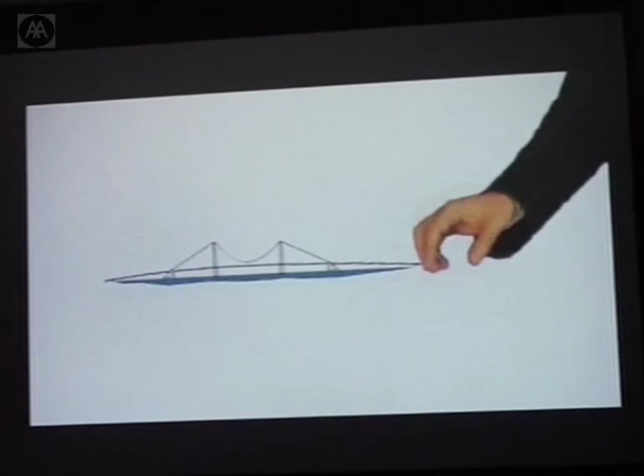Here, Denmark and Germany are planning a new bridge. The most expensive solution is a pure bridge, or a pure tunnel, but a hybrid connection of bridge and tunnel will save €500 million and provide a new artificial island in the middle of the crossing of flows of international traffic.

Today this area experiences negative growth, separating the Coma region, Copenhagen-Malmö, from the growth zones in northern Germany. The new superharbour could become an industrial and logistic hotspot, connecting the two existing growth zones to the continuous growth belt of the blue banana, turning the blue banana into the green slingshot.

The superharbour will gradually absorb all harbour-related industries, freeing up the waterfronts of all of Denmark's major cities for new urban life forms. So what kind of free space are we talking about?

Denmark's 12 biggest cities are all port cities. They constitute 360 square kilometers of urban substance and 36 million square meters of harbor space. The liberated waterfronts will double the size of the Danish city centers.

The freed waterfronts are worth 20 billion euros, 20 times the cost of the superharbour. If populated with the density of Tokyo, a third of the Danish population could move here, allowing all Danes to live by the sea. If stretched out, the new waterfronts constitute 120 kilometers of urban coastline, more than 25 times the length of Copacabana.

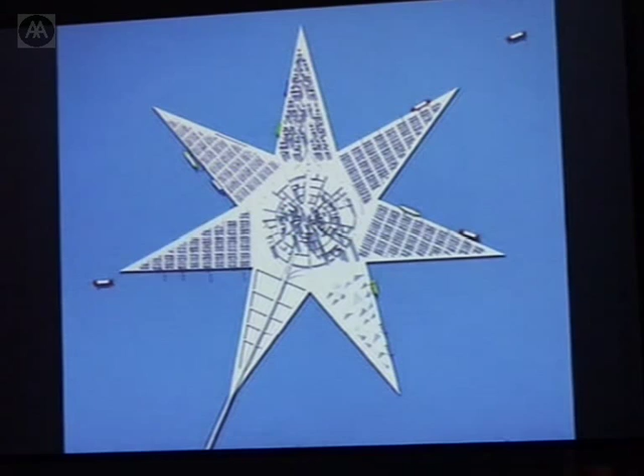He owns 25% of all containers in the world. He has the largest commercial fleet on the planet. And we thought if we would somehow make the design recognizable to him — he's Danish, by the way — we thought maybe he would tend to find an affection for it. So we submitted it to him, submitted the video, so he could take the idea if he liked it. But he declined.

So we had to leave it there. But recently, we had a meeting in the office with a guy from Guangxi Institute of Research, Design and Architecture in China. He really liked the project, because Guangxi province is believed to be the next growth zone after Beijing and Shanghai, positioned as the northeast entry point to Southeast Asia. So they're quite fascinated by this idea of an offshore Superharbour. We did some alterations to fit their taste.

And it follows this boom of different regional capitals making cultural landmark projects to position themselves in interregional competition for attracting foreign investment and know-how, spurred first by the Sydney Opera House, but especially by the Guggenheim Museum in Bilbao, almost becoming the 'Bilbao effect.' Until the Frank Gehry design for the Guggenheim in Bilbao, nobody heard about this Basque city in north Spain. But now everybody knows where it is, just because of the power of the architecture. And somehow the concert hall as a typology has become one of the preferred weapons in this arms race between cities competing to become attractive in regional competition.

The design is made of two elements defined by consultants: a shoebox and a black box theater. We couldn't really change the architecture of them, but we placed them connected at the back of this spine of the backstage area, and then used the parking to bridge to the city, and finally put the lobby at the waterfront connecting the two concert halls.

Instead of putting an object in the city, we made this stepped landscape as an artificial topography that would connect the city level down to the waterfront, move the landscape of the city all over the parking, and finally create access to the top of one of the concert halls, creating an arena-like outdoor auditorium for up to 2,000 people.

When you move down, the entire form has been created in order to provide as much connection and access as possible. But this monolithic landscape actually turns out to be transparent—the steps are floating, and you can see inside what's happening in the concert hall. From inside the main foyer, you have views into the concert halls, and you can see the city life happening on the outer skin of the building.

Between the concert hall and the soft stepped landscape of the outer skin, you get this gorge condition where you can access the different balconies climbing up the auditorium.

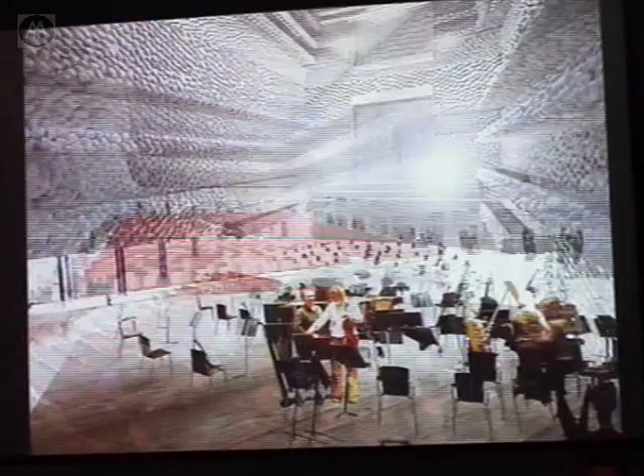Because architecture is always defined by trying to perform different things, we made this steady access, and these gorges are cut in order to bring daylight to the backstage functions. These steps are open in order to ventilate the parking. So here and there, the building is manipulated, so depending on which side you see it from, it changes character and architecture.

In the end, we got slightly fascinated by the fact that people moving on the building almost look like little pieces of music.

What happened was that the jury in Stavanger declined the project, but it was also on public display in the city, and the citizens of Stavanger could vote for their favorite project, and they chose this one as their favorite. So when the jury in Venice also chose it as the best concert hall, there was an article by a Norwegian art critic on the cover of the Stavanger newspaper saying that the people chose the architecture of the future. So we've been waiting for the mayor of Stavanger to contact us ever since, but the phone hasn't been ringing.

So the combination of the project about the harbors and this waterfront development has been quite characteristic for a lot of the production we've been doing in the office. The fact that the harborfront areas that previously had some industrial functions are consolidating frees up the former industrial wastelands for new culture and leisure functions.

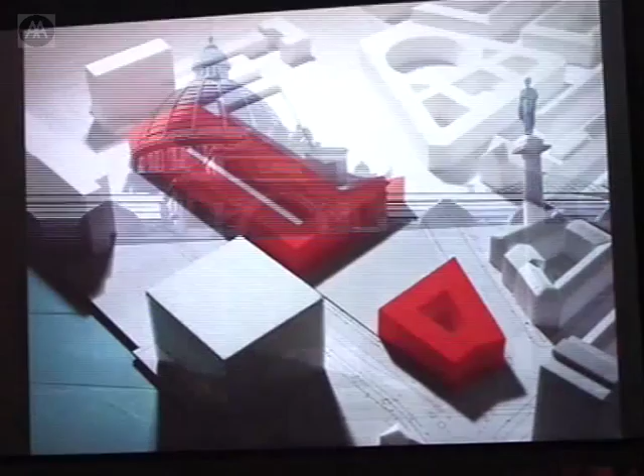So this was the site, and that was actually the local master plan. It looked like this, which wouldn't really give a lot of view towards the water, and it would create this super dead outdoor space.

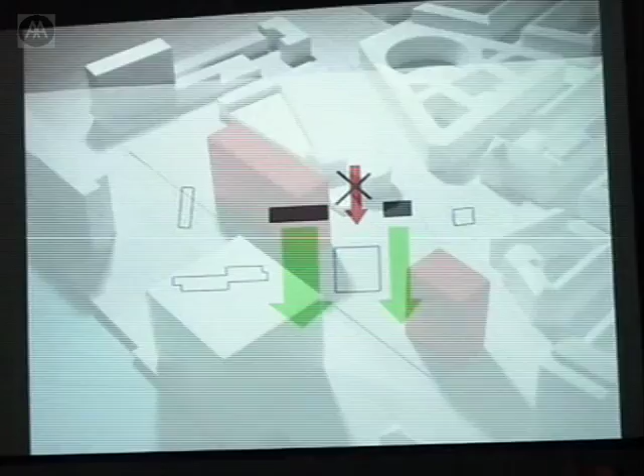Our big crisis was that all of the program of the project could actually be put just in these two super boring office blocks. They would give all the workstations a nice view of the sea, but somehow we found it really hard to criticize it, because on a client level it really did all it needed to do.

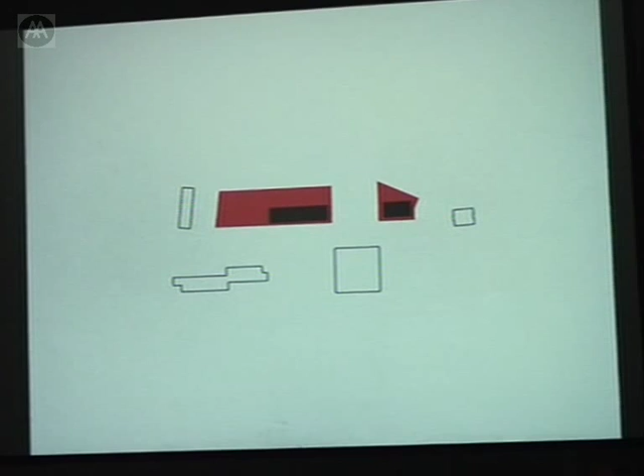But in the end we tried to say that what this place needs is not so much public space or urban space, but public life. So somehow by doing this we wouldn't really focus activity. It would be this modernistic wasteland with just empty space in between.

So in a desperate attempt to escape the logic of these two boring towers just in the gap, we went through this onslaught of, I think, 80 different attempts, just trying to find some kind of logic that would be able to wrest ourselves out of this quite boring scheme.

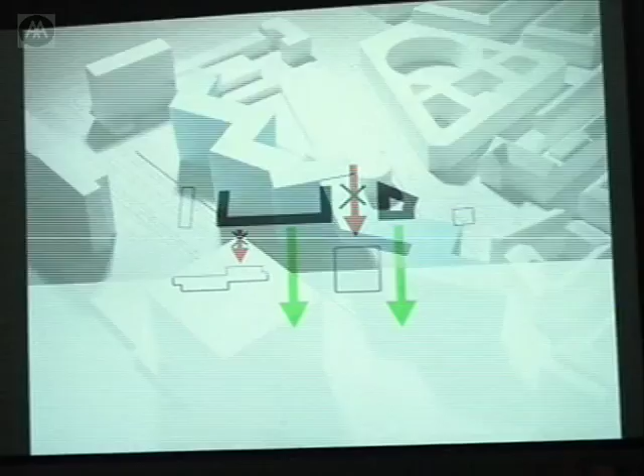So in the end we returned to the local master plan and tried to manipulate it by twisting and turning the buildings in this Libeskind-esque language. We could actually give all offices a direct view to the water, and the square would open up, also giving the square a direct view of the water.

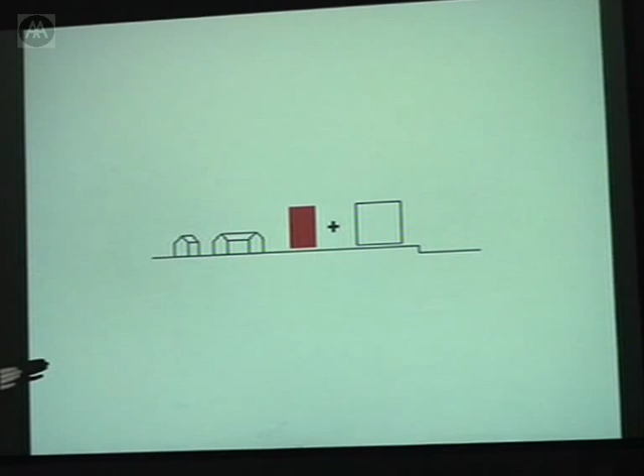And finally, instead of having this big open wasteland, we would make these nice little niches where public life and gardens could insert itself. Rather than just imitating the big scale or the small scale, we made this transition from the historical to the modern, giving this almost artificial alpine silhouette of buildings with roof gardens facing the city and the big facade facing the water.

Then finally, as an extra piece of program, at some point the office plans became too small to really function as an efficient office. So at the top we put these private homes that would be almost like little individual villas looking over the roof of the city.

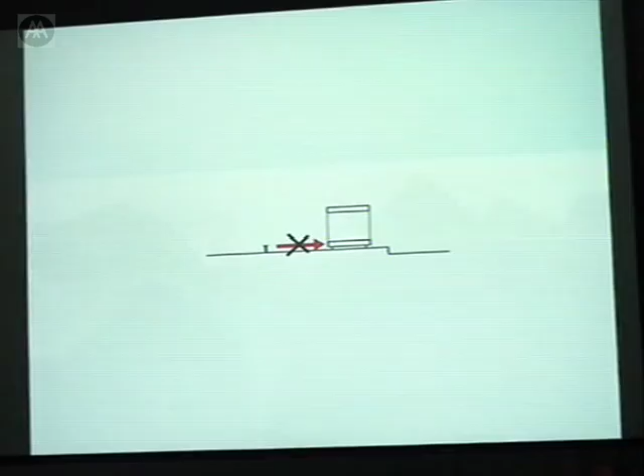And then finally we elevated the square so that the big existing bank that has this central void would actually become the view corridor for the life on the plaza.

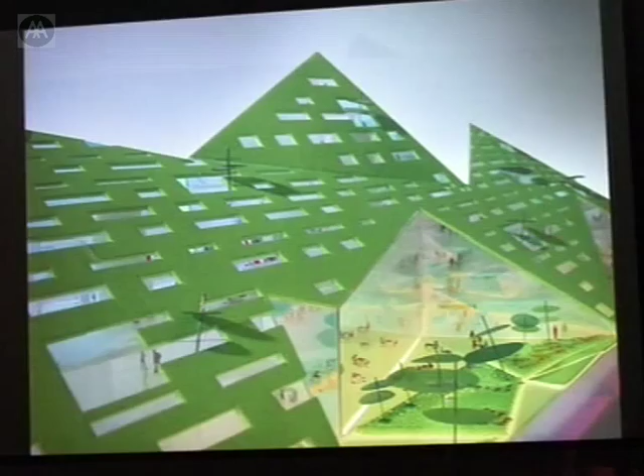You see these different small scale experiences that happen because of this larger move. So the plans move from large scale parking to shopping to offices, and then as the plans get smaller they convert to housing.

And you see the view from the waterfront.

Unfortunately, the clients didn't really believe in the scheme, and there had just been this project in Copenhagen by Erik van Egeraat, where he did these six extremely high towers. It was the same client, and the city of Copenhagen had voted against the towers of Egeraat. So as they cancelled that project, the client ended up giving this commission to him instead.

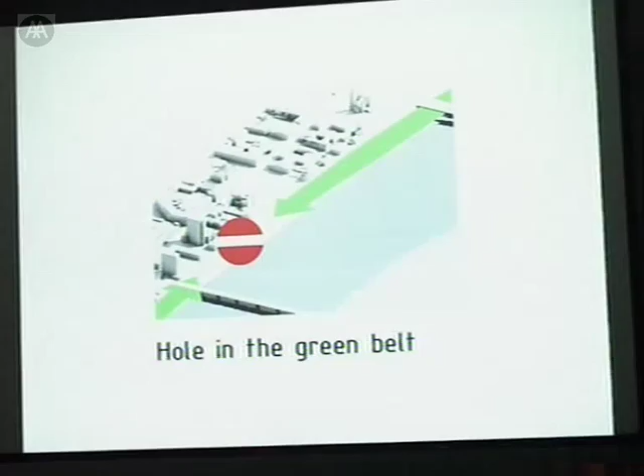But we kept doing waterfront projects. We got invited by a client in Umeå in the far north of Sweden, who had acquired this waterfront site that used to be industry, an industrial hole separating the possibility of having a waterfront promenade.

Also there's this very heavy traffic road shutting the side streets off from connecting to the water. And finally the skyline was dominated - it's this historical Swedish city where the skyline is dominated by these two quite boring towers.

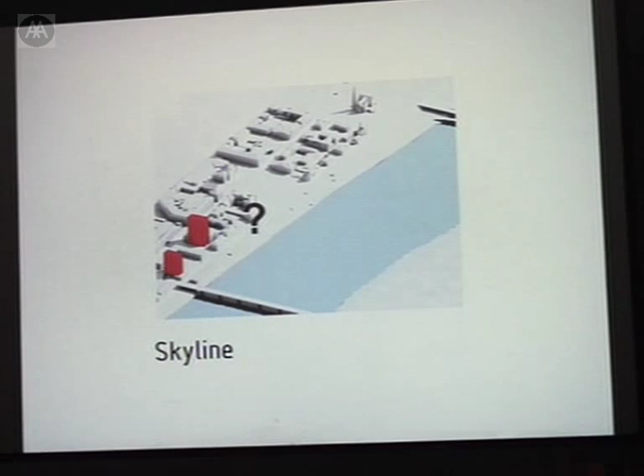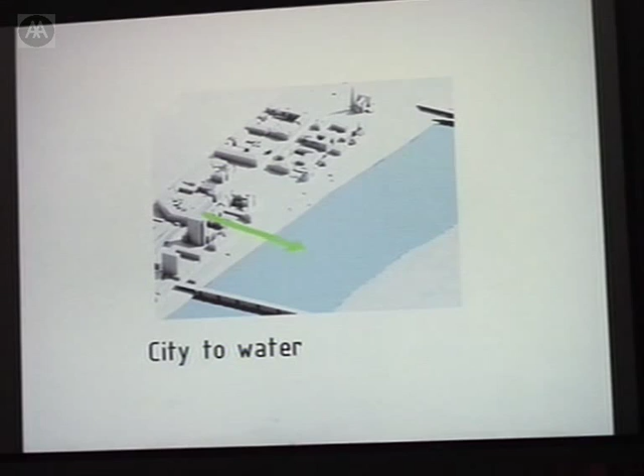So we decided, okay, we want to reinsert the waterfront promenade. We want to make sure that access and view from the city to the water is preserved and reinforced. And finally, we would reclaim the skyline of Umeå, both giving all the hotel residents views up and down the river to the east and west, but also making a new landmark instead of these two slabs. So how to do all three things at once?

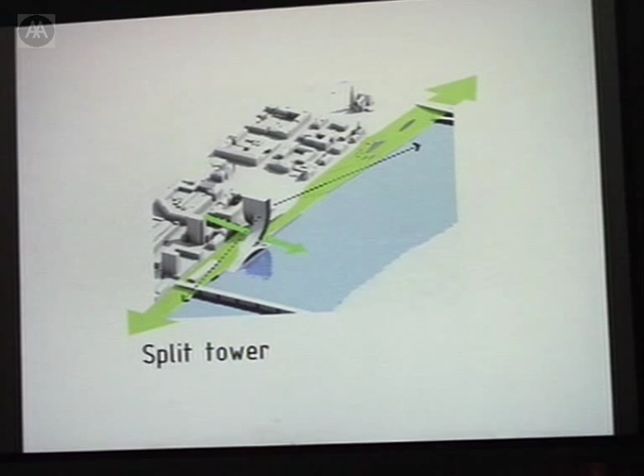We decided to take the standard icon of a hotel slab with east-west facing windows, and then tear it open at the bottom so it would merge, creating a spa and swimming pool touching the water, and a conference center and meeting room complex facing the city, then opening up to allow contact for the promenade to pass through and for the side street to go down to the water.

So it will look a little bit like this. It's basically the street pavement waving up, becoming the roof of the conference center here, allowing views, and also like these holes in the ice. There would be these skylights bringing daylight to the submerged functions, and then the intensity of the skylights would increase, becoming windows for the hotel rooms.

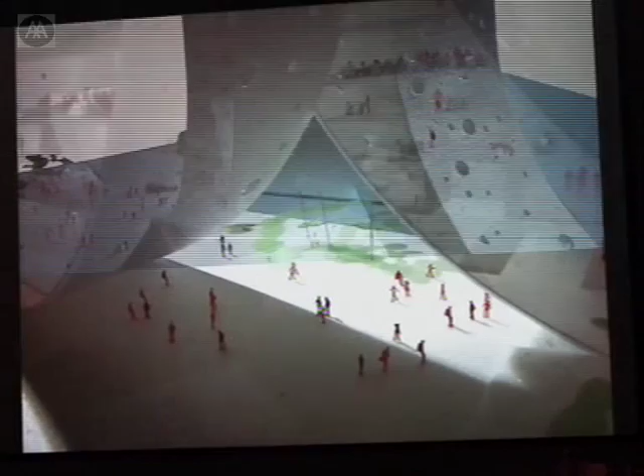This is the view from the side street. And the building would spread its legs open and create this covered plaza that would still be able to get sun, but would protect from the Scandinavian climate.

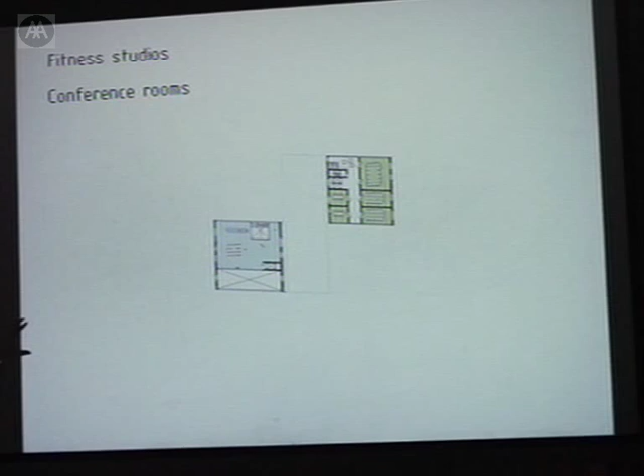So if you start at the top, there's this rooftop bar, and then a series of quite traditional hotel rooms. But then at some point the building starts sliding apart, and just at the moment where the two towers kiss is the moment of the lobby. And then they continue separating, becoming a meeting room complex and conference center on one side, and fitness and spa on the other side.

So when we submitted the project, we were quite excited about it. We thought it was really quite a building, but maybe it didn't look like something from the north of Sweden - it was probably more something for Shanghai or something like that. And the client also thought so.

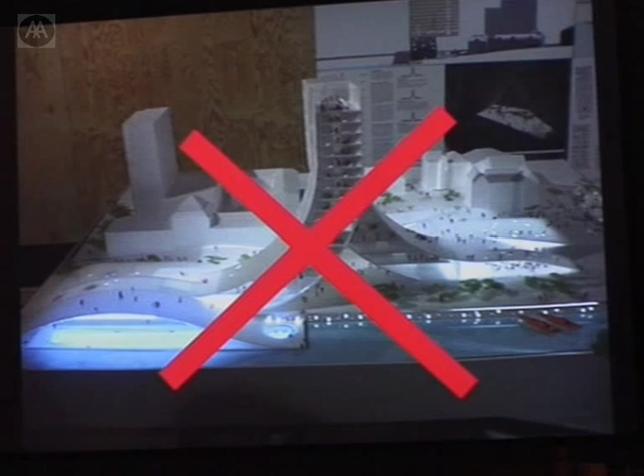So we lost. But recently, when we had the meeting with this guy from the Guangxi Institute, he saw the project and he said, 'Wow, that's the Chinese character for the word people.' This is actually how you write people in Chinese. There it is - I think it's pronounced Ren.

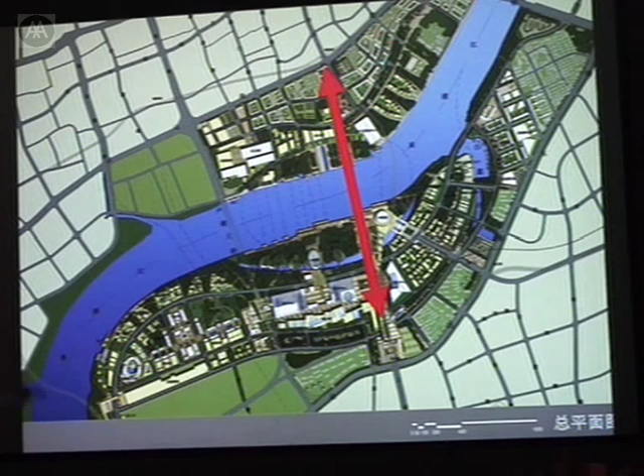Also it turns out that the subject for the Shanghai World Expo in 2010 is 'better city, better living,' to project the Chinese pursuit, the Chinese people-oriented pursuit, is how it is. And it's actually on the waterfront, and there's this axis crossing the river.

So we made a version - in Umeå it was 60 meters tall. Here we made a version that's 250 meters tall. But a beautiful retrofit: one building goes into this building for body culture, the other for mind culture, conference and sports, creating this super clear word standing at the waterfront.

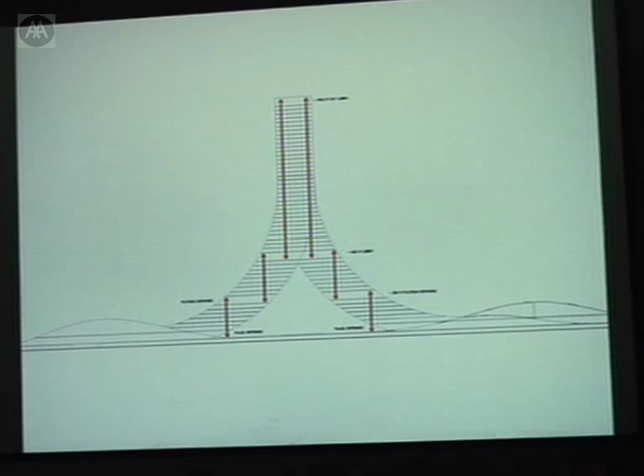So actually in two weeks we are part of an international design exhibition in Shanghai, where we're going to present this project, hoping to find a friendly client.

So this was how it looked like in Umeå, and hopefully it could be the Eiffel Tower of the 2010 World Expo in Shanghai.

It's not the first time we've worked with literal ideas in architecture. In another city, we did a master plan for the waterfront. Most of the land belonged to a private company, but the only strip the city actually owned was this tiny piece right in front of the water. They'd been discussing for 25 years whether to develop it, because if you built like you normally do in the city of Vejle, you'd build 4 floors, and to get sufficient economy you'd have to cover the entire waterfront and block the connection from the city out to the water.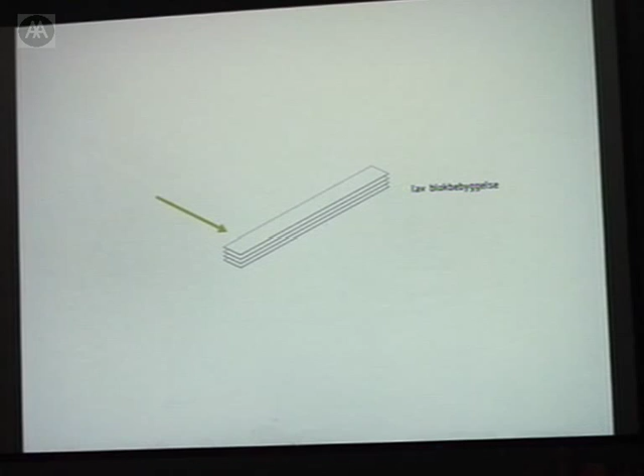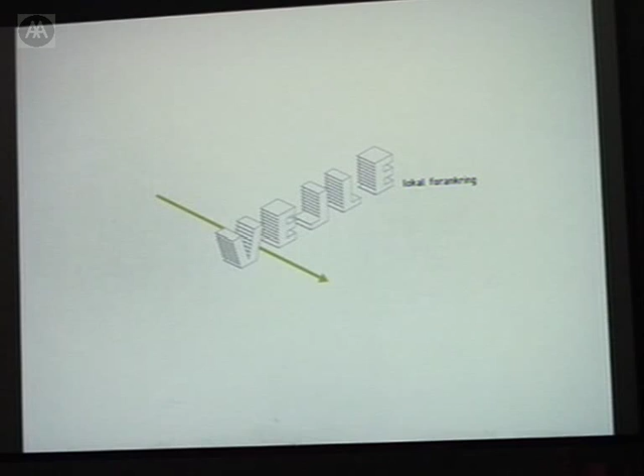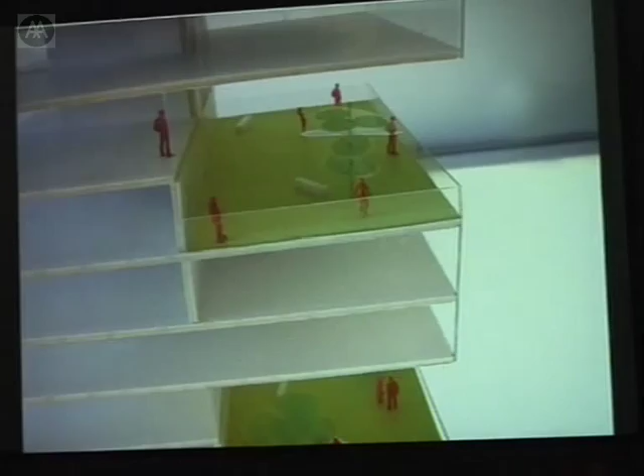So we said, okay, we build twice as high and half as wide, but instead of 5 anonymous modern monoliths, we decided to give them some local character. So this is actually the name of the city, Vejle. Normally I'd think this was a lame idea, but in Vejle it turns out the typographical qualities are actually quite nice. The E has these elevated roof gardens where people can hang out — simple, slightly sculptural buildings that, seen close, are just slightly expressive architecture.

But the further you get away, the clearer it gets, and when you drive over the bridge, you're going to have a pretty clear idea where you're going. This actually managed, for the first time in 25 years, to gather the entire city hall to vote for selling the land, and we submitted a bid together with a big housing company and a big developer. There were just municipal elections in Denmark yesterday, so soon it'll be decided whether this is the future waterfront of Vejle.

It's by far the one project that got the most instant response — it even made it to a double spread in Tank. So I think we'll try this idea now.

Back in Copenhagen, there was recently a big foundation that made a call for better urban spaces, saying to all the cities of Denmark that people could come with ideas, and they would pay half the budget of realizing it if the city or whoever was interested paid the other half.

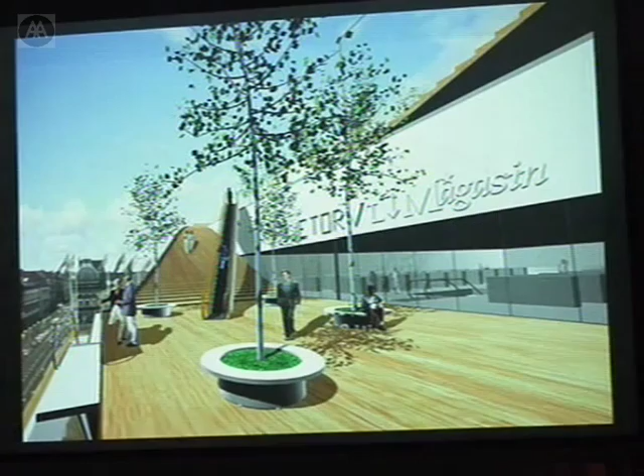A bit like vacuum forming a big public plaza on top of an existing roof. It turned out Magasin actually has this double facade where they used to have access for the ventilation system — now they have a new system. So we found we could slide in an escalator without even penetrating the building, giving access to a shelf that provides a new entrance to Magasin, and you could continue up onto this big square.

Also, Magasin had just gotten permission for 100 new parking spots, so we could extend the parking and get a drop-off at 30 meters — you could actually take a taxi all the way to the roof of Magasin, go in, drink a coffee in the cafe. At night, this Spanish staircase would host different events, and it would be the place you hang out in summer. Finally, in winter, this would be where you'd drive up and get your Christmas tree.

There's this sports foundation that normally sponsors an ice hockey rink on the ground in winter — they could sponsor some snow cannons, giving us this skiing mountain at the top of the city. We submitted this in 2003, and it got selected as one of 7 projects the foundation would realize. But at the same time, the department store was getting into financial mayhem.

So they've been for sale actually for quite a while, and finally they got sold to an Icelandic company that has now shown some interest in the project, but we can't really say when it's going to happen.

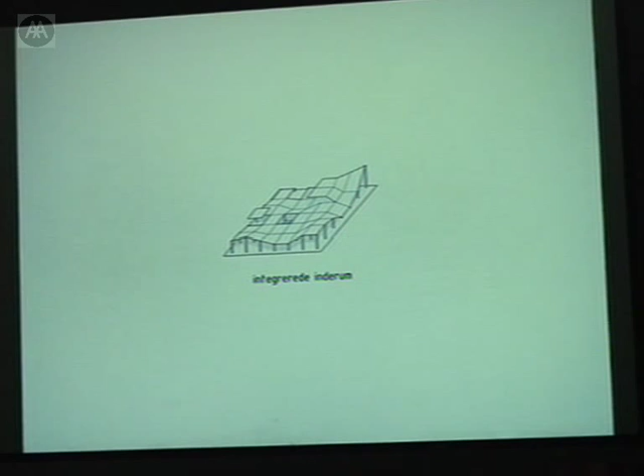So when we were hammering down the piles, we could hammer them a little deeper and get some access to the water, lift it up higher to integrate the youth club buildings. And we showed the client just these very simple diagrams saying, you can consider this your magic carpet. You can twist and turn it however you like to make it do whatever you want. And we'll just be your architects and build it for you.

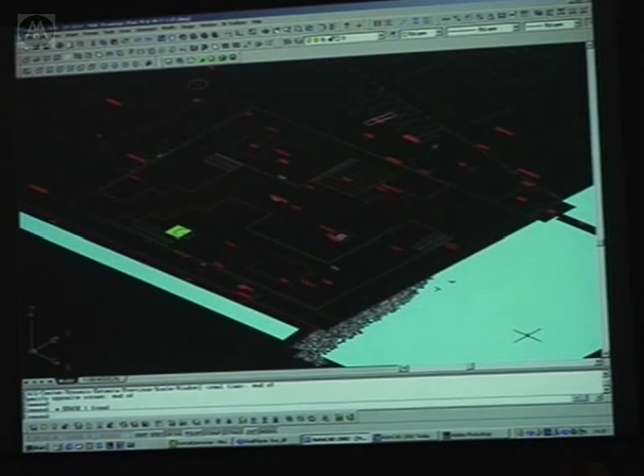So they got this inventory of possibilities that they could twist and tweak this wooden deck with. And when we actually won, it was a small invited competition for 5 offices.

So when we won the project based on the idea, we actually didn't have a design, and we started sitting down with this rational 240 by 240, almost Miesian grid, putting like a workshop and a dressing room building and a clubhouse building on the other side. That in plan are really rigorous, but in section they become more interesting.

So you have this diving down to reach the water, climbing up to be the shelter of boats or to contain the clubhouse.

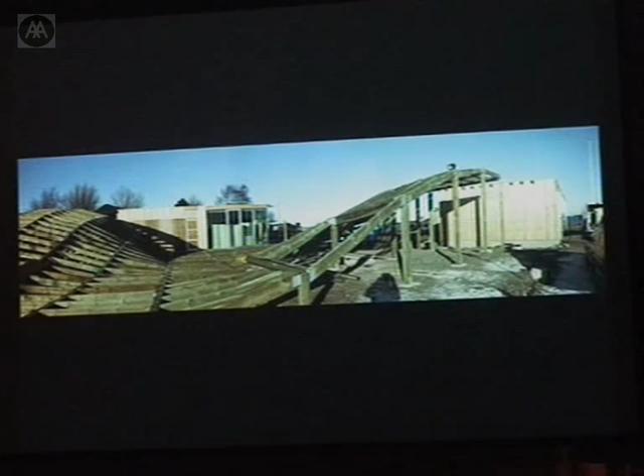And it's actually all this quite traditional timber structure made by normal carpenters. But you see, as soon as you put the wood cladding on, it becomes this very smooth, almost dune-like landscape.

And also it has a generosity and it tends to invite, because instead of just being 400 square meters of buildings, it's 2,000 square meters of public landscape.

We got the city to approve that they consider it a landscape, because normally if you do something that has a slope higher than 1 to 12, you need to fence it off. But here they actually accepted this insane 45-degree slope, just because they see it as a landscape project.

And it has this instant electrification effect on kids, that just by seeing these swoopy things, they start running around. Actually, it's so steep that you can actually slide on a pair of jeans.

And also, so basically the building is super simple, like glass, concrete. The material palette is really restricted because the main idea is this big public gesture of the public landscape.

And so because of the generosity, it has really become a place where the local people go at night to walk the dog or take a walk with a girlfriend. And it has really become part of the public life down there. The Maritime Youth House was the first building we ever realized.

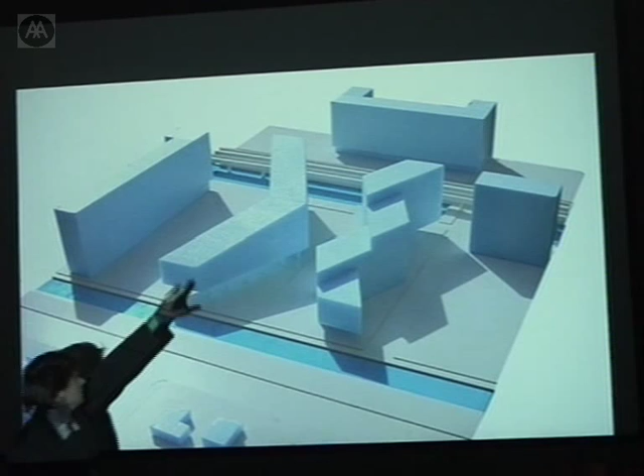So on one side, next to the suburban neighborhood, we could only build 16 meters, but towards the city and the park, we could build almost 40 meters. So the building is, one part, the V-shaped building, is sloping, and the other is jumping. That's why it's called the VM House in plan. VM means 'world champion' in Danish, which we kind of like.

But the south side is dominated by these balconies. There were going to be 110 balconies, so we knew that whatever we did, the balconies would define the architecture.

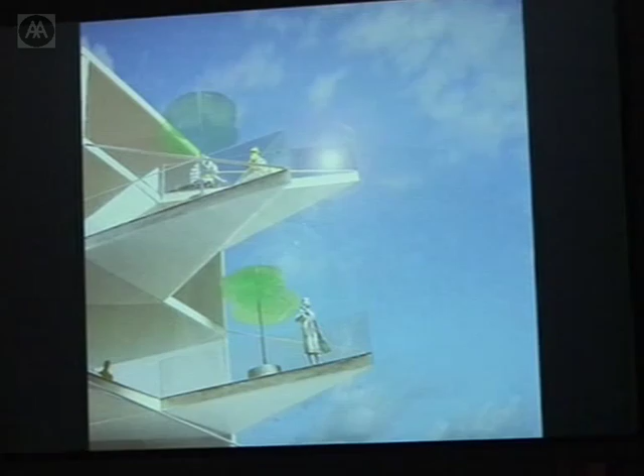We thought it would be a pity to just make a composition of boxes. So we developed this balcony type that our client ended up naming the Leonardo DiCaprio balcony, because you have the experience of standing 30 meters up, 5 meters out in the air, with some hot redhead.

But another interesting effect is that this is going to be the first building realized in this part of town. It's going to be a pioneer building out there, with no neighborhood whatsoever. So we thought, if you're living on the 10th floor in an empty neighborhood, it might be sad.

So this was the first balcony that went up, the first bunch, and here's how it looks today.

For the apartments in the V house, we used balcony access on the north side. For the M house, we decided to use a setup inspired by Le Corbusier's Unité d'Habitation, where 3 apartments wrap around a central corridor.

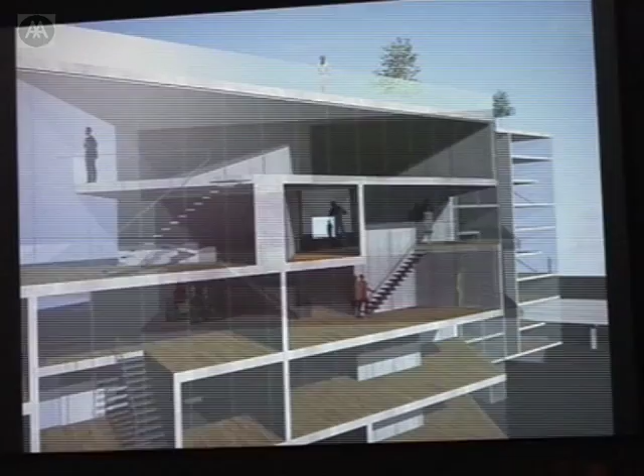But where in Unité it's a 300-meter long dead-end corridor, in the M house, because it's zigzagging all the time, it's more like bullet holes penetrating all the way through the building, with views of the landscape on both sides, wrapped around with apartments.

And they're sort of treated in the same way all the way around, so it really becomes this excavation through the building. And actually two of our friends moved in there, and instead of just having this staircase, people are accessing from these corridors. After a month, they had a big party where they had this thirty-meter long table in the corridor. So it really became a social space.

The apartments are all based on this idea, because everybody we know who just bought apartments spent the first two months knocking down walls, making bigger spaces. So we thought we'd save people the trouble and only make one-room apartments. So all apartments are just one big space.

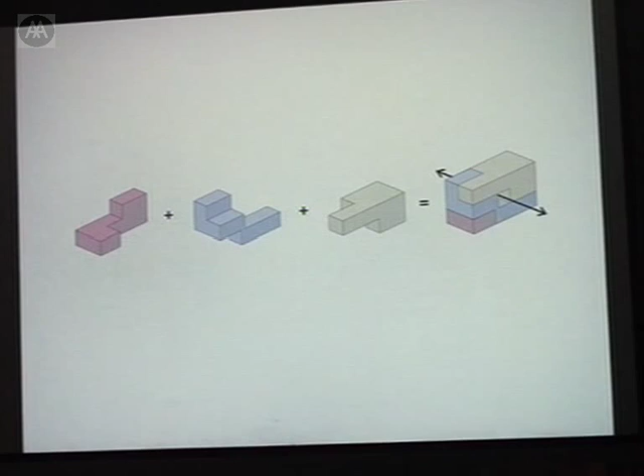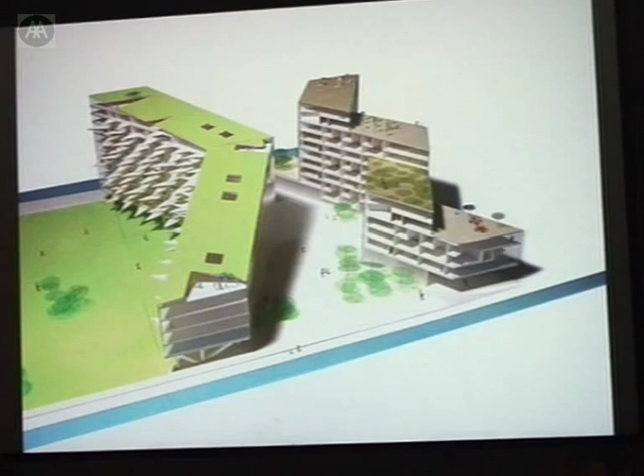But then they have this three-dimensional variety in the V house. It's like two types that double width to the south and double height to the north, which constitute this generic building block. In the M house, it's this idea of taking Le Corbusier slightly further. So instead of having these super deep, narrow apartments, we put three units together so they borrow width and height from each other. So two duplexes and a triplex make this generic building block. But because the V house and M house are cut at odd angles, the roof is sloping and zigzagging, so you get this onslaught of eccentric apartments. Based on the five main typologies, you get this wallpaper of 76 different apartment types.

So this is what it looked like this summer, where the M house was almost complete. The apartments have this combination of double-height spaces where you enter, with a bridge going over this void leading to the rooms downstairs. Most apartments are duplexes or triplexes. We did an exhibition where we invited five different artists and designers to decorate some of the apartments.

The real estate agent had told the client that it's all duplexes and triplexes, glass from floor to ceiling, like living in a fish tank — people won't buy it. But actually, on the first day they were for sale, they sold 100 apartments, and they were sold out in three weeks.

So the first day they had opened, the first people who moved in, I took my car out there and looked in the evening. The real estate agent had been really worried that the Danes wouldn't be able to tolerate this amount of glass from floor to ceiling. And I was sitting in my car, and I look in, and there's this guy sitting watching TV. I thought, okay, he's really on display. Then his girlfriend comes in wearing panties and a t-shirt, and they start kissing, and then they start making out. I'd been parked there for thirty seconds, and there was already action. So the real estate agent was right, but somehow it works anyway.

The material palette is extremely sober because it's so geometrically complicated — there are so many different apartments. So it's just glass, wooden frames, and this aluminum cladding.

In the end, we thought that maybe it had become slightly too dry. So for the two big entrances of the M house, there was going to be this fifty-square-meter blank wall, and we wanted to do something more special. But the client said, you know, we can't burn any money for fun.

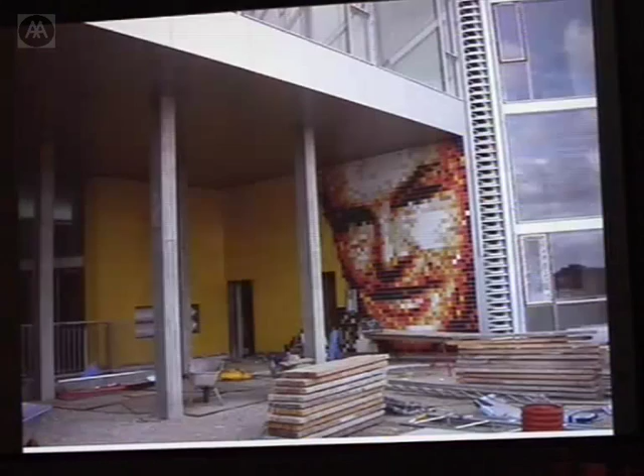I thought it was really fascinating, this idea of this almost Renaissance architect, Leonardo da Vinci, who is both architect and painter and scientist. So we told the client about this — this is Per and Axel. We told them about this idea of the Renaissance architect who would build the client's house and then paint this painting as a homage. Because the surface was so big, we found out that we would just use these standard 10 by 10 bathroom tiles, and only the 10 standard colors from the Evers color palette. We'd make this decoration that would be just a diffuse geometric pattern, but seen from a distance.

There's actually a kindergarten right next to it, so when the children enter in the morning, they have to say hello to Uncle Per and Axel.

One effect was that apart from being happy about selling the apartments, the client also got pretty happy about having their faces in 50 square meters, almost totalitarian scale. Out of enthusiasm, they bought the neighbor site, where the local plan said there had to be a parking house. The strategy is that instead of having parking on the street, there's going to be these parking houses where people living there can park. And he was going to do housing and the parking.

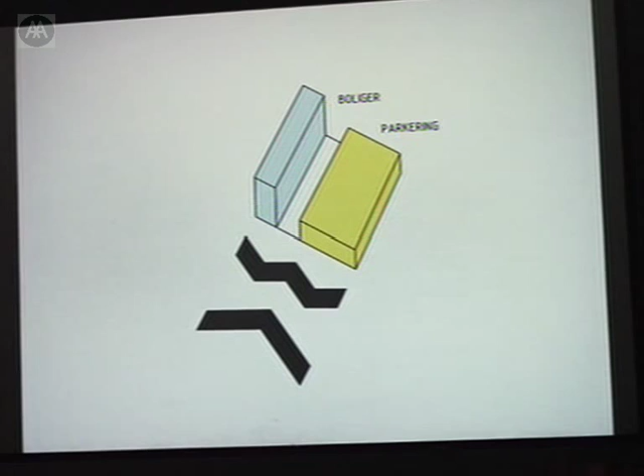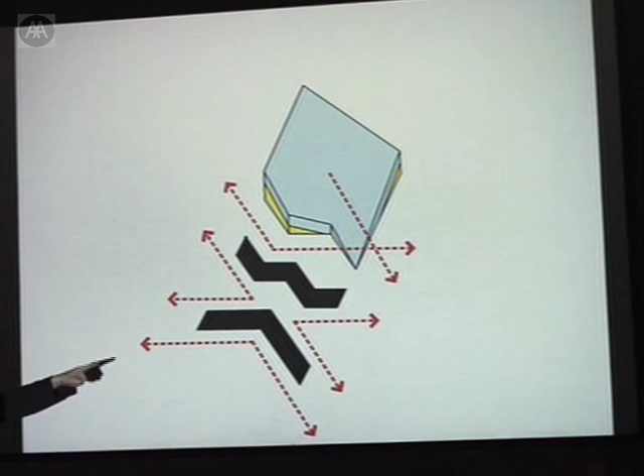So we proposed that, since all of Denmark is completely flat and most of it is semi-reclaimed land, why don't we consider the parking as the potential for a topography upon which we can build this thin layer of houses. By twisting it, we'd get a south-facing tilted plane of one floor of housing, sitting on this bedrock of parking. Then we'd cut it up so that people who bought an apartment in our VM house would still have a nice view. The parking would be below and the houses on top, almost like a suburban neighborhood flowing over the parking.

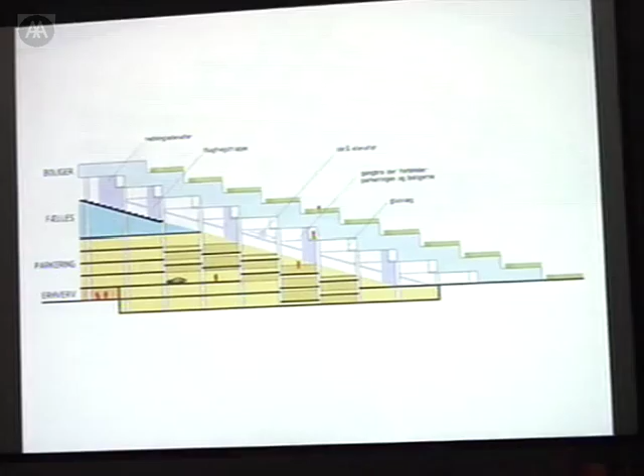So on one side it's like a pixelated mountain of single-family homes, each with a 100 square meter garden looking to the south. The parking, instead of being this flat stacked space, becomes a diagonal cathedral for motor culture, where people access their apartments from the roof. From the view of the mountain, you have this extremely suburban lifestyle with garden and house, but in an urban setting.

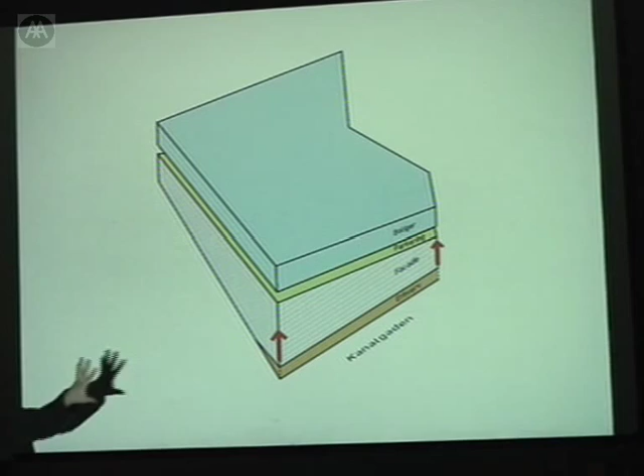And then you have this amazing artificial landscape rising to 35 meters of height. The slope of the mountain faces towards the neighboring suburban neighborhood, but the city facade actually becomes the parking, and it needs to be a naturally ventilated parking for the economy. So we need to put some kind of rain and wind screen that's still perforated.

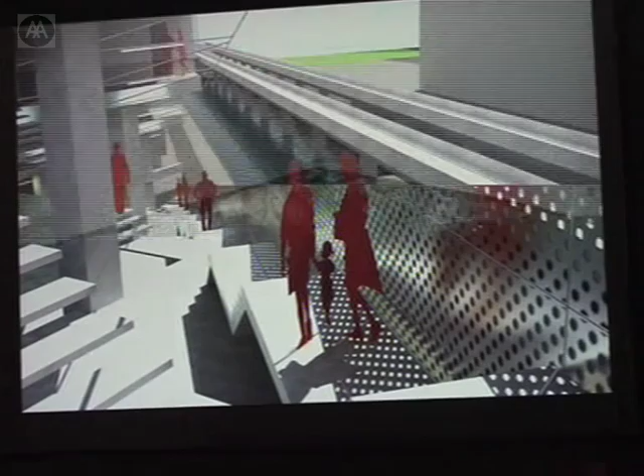We asked the company that makes perforated plates, and they just bought a new machine that can make holes up to 3 centimeters in diameter, based on bitmap input, at the price of 100 euros per square meter. Since we've always referred to it as the housing mountain, we contacted a Himalaya photographer who gave us this nice image of Mount Everest. That's going to be a 1,500 square meter black and white reproduction of Mount Everest, probably the largest black and white photo in the world. Seen from inside, it's just an abstract pattern, but from the outside, it's a portrait of the Himalayas.

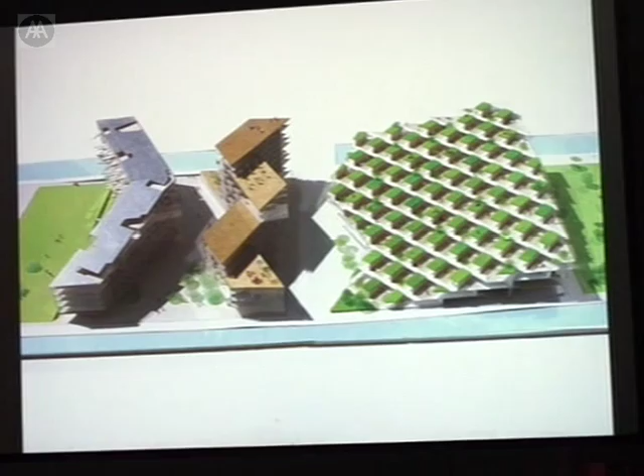So basically, if it turns out to be a success, we're going to repeat it as much as we possibly can. The last project in this series—there's 4 more projects to go—is a sign that there's an increasing desire for experimentation happening. When we started 5 years ago, just doing a semi-unusual housing project was really radical, but now this mix of houses on top of parking with shops is quite normal.

Recently we were contacted by 10 existing car dealers who wanted to move together into a new car house just on a neighbor site. So all these existing car dealers want to move together into a new 16,000 square meter showroom. But they're also going to combine this showroom with shops, housing, and parking in a node where the subway, the regional train, and the highway cross each other on the way to the airport and on the way to Sweden.

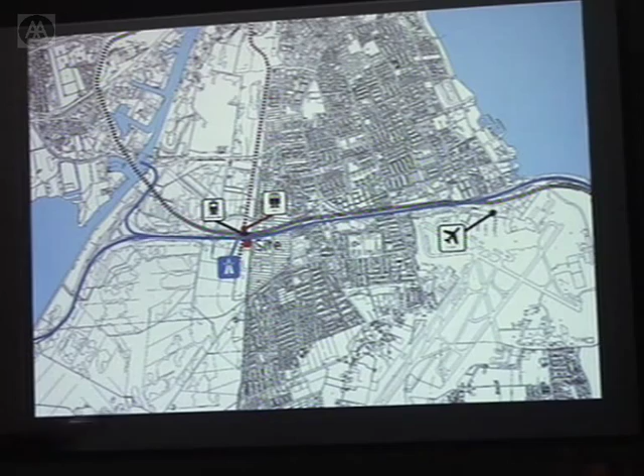And of course, as references, you have these automated parking systems, especially the Fiat factory in Torino, which we were quite fascinated by.

Of course, the vocabulary of highway structures.

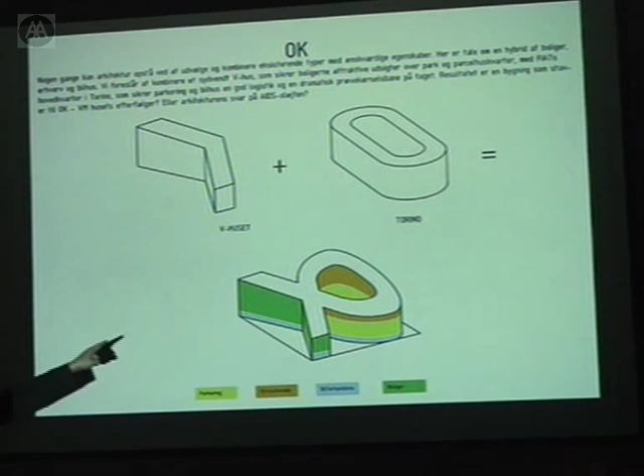Our first attempt was to try to make a new building by combining some existing buildings that we liked. At the time, we were really happy with the V house. We also really liked the Fiat factory, and maybe they could merge to become the OK house, or maybe the AIDS ribbon house.

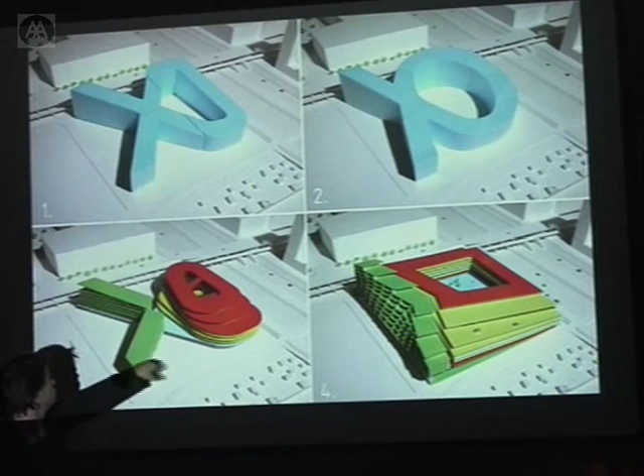But somehow it was a bit too boring, because it would really just be a parking building with a showroom and a housing building to the south.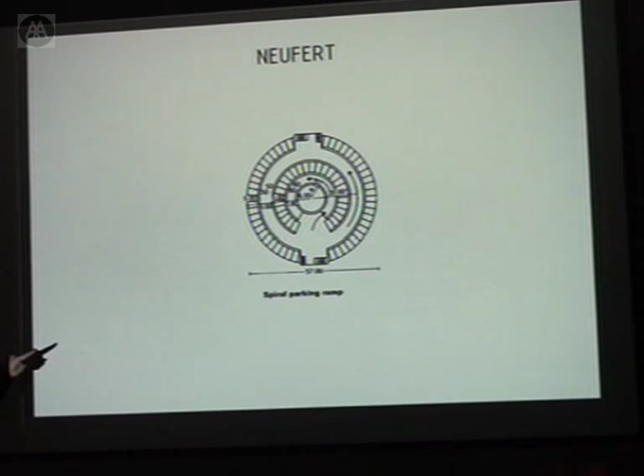So then we decided to consult our friend Neufert and look into parking systems. Quite quickly we singled out this one we really liked: a 60 diameter spiral ramp where the spiral becomes so big that you can actually park, and the slope is so gentle that you can park all the way up. Then in the heart of it you have a high-speed descent, like a corkscrew spiral going down, and you can leave.

So we thought, why don't we make an inverted perimeter block? Instead of having buildings on the periphery and empty space in the middle, we'd have a solid of parking in the middle, and all the different functions would stick out in different directions - showrooms towards the street, housing towards the south - and you could have car access all the way to all the floors in all of the buildings. We thought it was pretty cool, but somehow it looked a little bit like the V house in all directions.

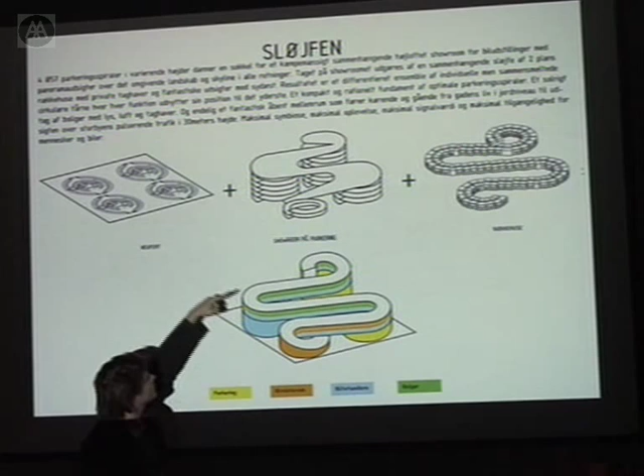So we kept looking and came up with this: the parking could be almost like a socle, elevated podiums of spirals, so we could create something like the Guggenheim Museum in New York - a continuous showroom where you take the elevator up to 35 meters, then meander down this 1 kilometer long showroom all the way to street level. You could easily drive cars in and out of the showroom. Then as the roof of the showroom, there would be a 1 kilometer long row house development of 2 floors. Suddenly it looked a lot more interesting.

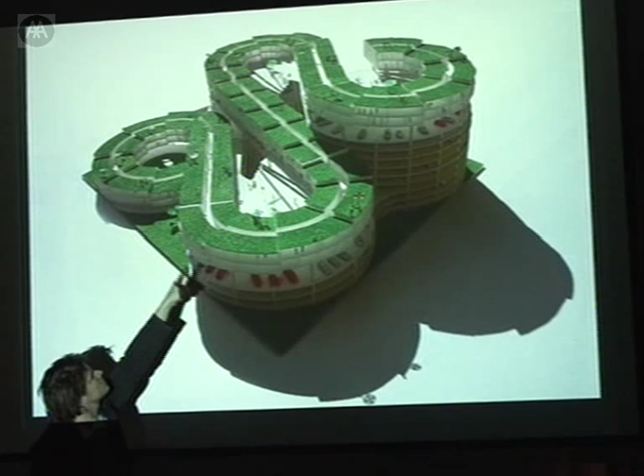So basically you have the parking, the showroom, and the housing. Each apartment is a duplex with its own private garden, and there's a skylit access street so gently sloping that you have handicap accessibility all over - a kid on a skateboard could probably pick up some pretty intense speed moving down.

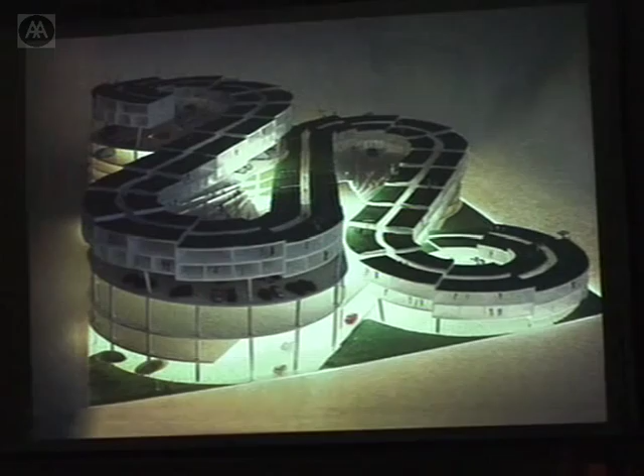This is the basic diagram: the housing being the roof of the showroom, and the parking being the foundation. The showroom is this meandering, continuous space that twists and warps slightly, covered by courtyards that follow the homogeneous stepping of the houses, creating skylights that bring light and views into the showroom.

So as you move up through the plans, it's a bit like a race car track with 3 different programs chasing each other up the hill.

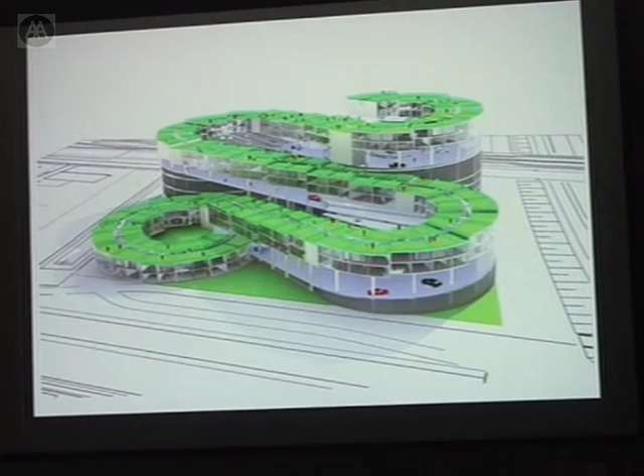We presented it to the car dealers, to a housing manufacturer, and to the parking company, and they totally liked the project. You can actually see the V house under construction in the other end of the image. So it's going to be this plot strip of the housing mountain, the VM house, and this car city emerging.

As a last housing project in Copenhagen - we just had municipal elections yesterday, and the mayor who got elected, Ritt, is the first female mayor of Copenhagen, and her political program was to create 5,000 new houses in the center of Copenhagen, but there's no real space for it.

So to be prepared for her getting elected, we decided to figure out where we could actually locate these 5,000 houses. We found this piece of green that's within the city limits - this big open sports field.

It's where all of the socialists and the unions have their sports fields - the former airfield of Copenhagen, now this big open sports field. It's so much part of the social democrat culture that proposing to build on it would be completely suicide.

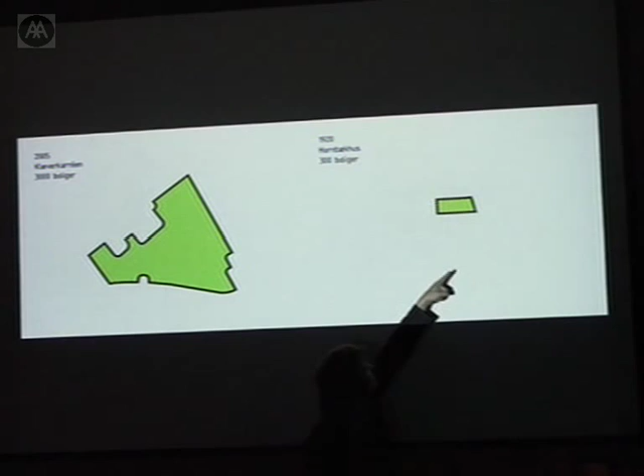So this is Hornbækhus, designed by modern architect Kay Fisker. It's the biggest perimeter block in Denmark, famous for its big, green park in the courtyard.

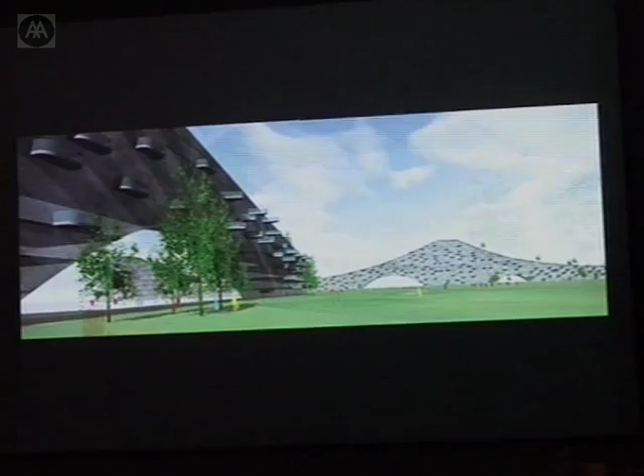This would be 10 times bigger, and for the first time, the most attractive view would not be to the street side, but to the courtyard side, because you would have this massive central park. From the park you would still be able to see the green trees of Christiania, the free city where you can still buy hash legally, or semi-legally. And you have the historical towers sticking up, with these vast gates opening up to the park.

For now, we're working with this idea that we could create a Copenhagen version of the Great Wall of China, a 3 kilometer long animated landscape moving around. Sort of a bit like this.

It was just published in the newspaper, 2 days before the elections, and based on that article, we got contacted by a group of investors. They already paid us for the work, so if it works out, it will be our first completely self-made commission.

The 2 last projects that I brought are actually the first project we ever did and the last project we did recently, but they're somehow related. The first project was done after we'd existed for 6 months. It's a waterculture house in the north of Denmark.

Our idea was to turn the traditional swimming pool inside out. So instead of making a building and putting pools inside it, we would organize all the water areas optimally, and then subordinate the land to the organization of the water. The pool program consisted of a diving pool, a relaxing pool, a playing pool, and a swimming pool.

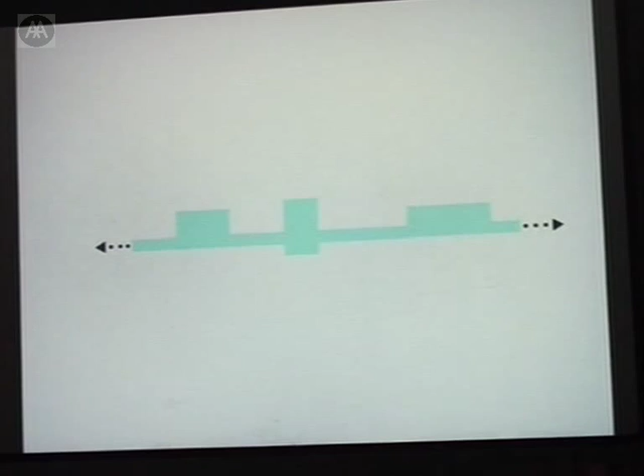Our main idea was to stretch out the swimming pool to create this 150-meter long canal that would join all the other pools as lagoons. So instead of being in the water, going on land, jumping in the water again, we would actually swim from one activity to the other.

Just like in a stadium, we would connect the ends to create this lake with an island in the middle, and we put the lake in the landscape next to the existing sport facilities. The lake would have all these different programs, and the island would have different peninsulas with the lifeguards in this panopticon position in the center.

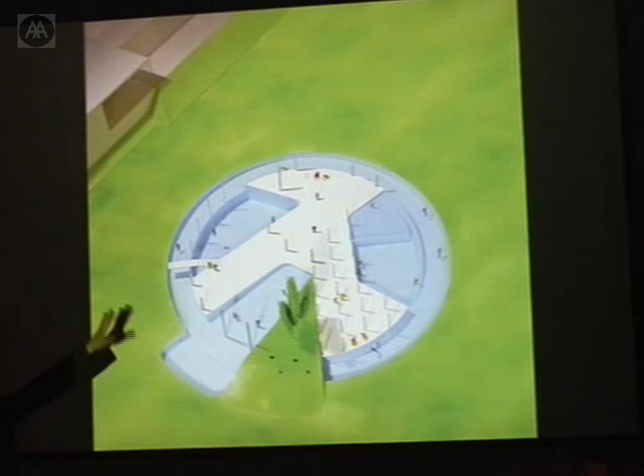The design would be like this, this nice island with pools of different depths all the way around.

In order to ensure the idea that, instead of swimming back and forth inside a swimming pool, you would actually be swimming along the view of the landscape, like a 360-degree panorama, we lifted the facade 3 meters, completely without columns, so you'd have this amazing view of the surroundings.

Normally in swimming pool designs, outside the pools you have this layer of fat of dressing rooms, toilet rooms and arrival areas and stuff like that. We put all that into beams spanning the circle in the attic.

Those programmatic beams sit on stilts that rest on the island, and then they go out and carry the facade. So here it would be the thermal baths, the dressing room for men, dressing room for women, the roof of the men's dressing room becoming a terrace, and finally the restaurant becoming a bridge with views of the surroundings and of the diving pool.

So you would enter, dress in the beams above, go down onto the island and jump into the lake. At night it would be this hovering UFO, with people swimming along the landscape.

For the diving pool, we put in a climbing wall made of huge sheets of glass where we glued on climbing holds, so you would fall into the water.

The thermal baths would be this sort of Sumo-esque collage of different rooms with different temperatures. The thermal bath would have a staircase going up to hotter and hotter steam. The massage room would have a hole in the floor so you could look at people swimming by underneath. Some rooms would have water all the way around.

We found this extremely nice website called the Sports Illustrated Swimsuit Edition. That turned out to be very helpful for the competition.

And the sauna would be this sort of a little piece of Finland, looking out into a birch forest, and right next to it a room with no roof, so you can roll in the snow in the winter, have a rain shower.

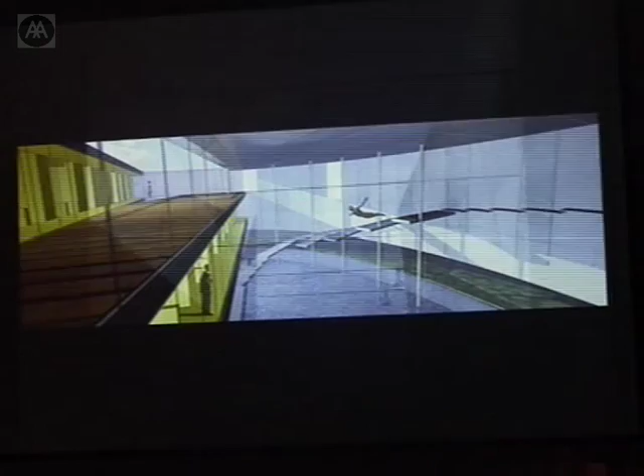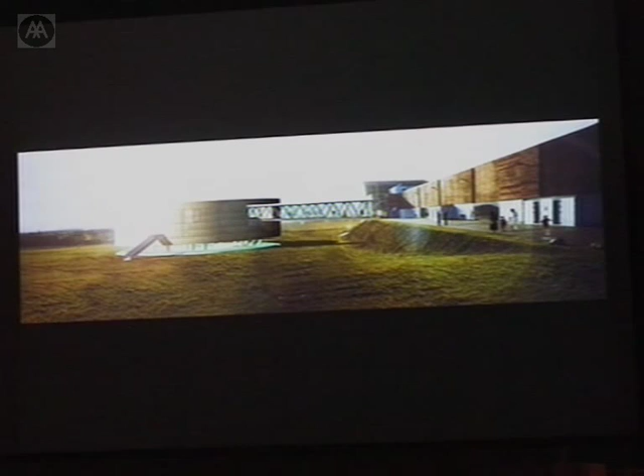So this is basically what the project looked like. We won the competition, and based on that we could hire real architects to run the project. We got a real office space, bought licenses to all our software, and became a real practice. We worked on it for a year and a half until there were municipal elections four years ago, and the new municipal government decided to cut the project out of the budget.

So in response, we cut the city out of the project, and went on this tour to see if we could find a new host town.

Quite quickly we had a meeting with the mayor of Randers, who was very fascinated by the project, and we started doing it with Randers instead.

But then they discovered they had fungus in two of their schools, and the bill was 100 million kroner — exactly the price of a water culture house.

In the meanwhile, we contacted one of our friends who's a computer game designer, and thought, if we can't actually swim in there, at least we could kill each other in a nice environment.

It turned out that when he was designing the project for us, he told us about the concept of gameplay, which is actually quite cool.

Not knowing which kind of 'ism' we would belong to — gameplay is the way you assess the quality of a game design. It's not about the most beautiful graphics, and it's not about the biggest game, because it might get too heavy, or if there's too much variation you might get lost. Or if it's too well-tailored a plot, it might not leave you enough freedom. So there's a lot of parameters where you have to find the optimum balance between the specific and the general, and also between effort and effect.

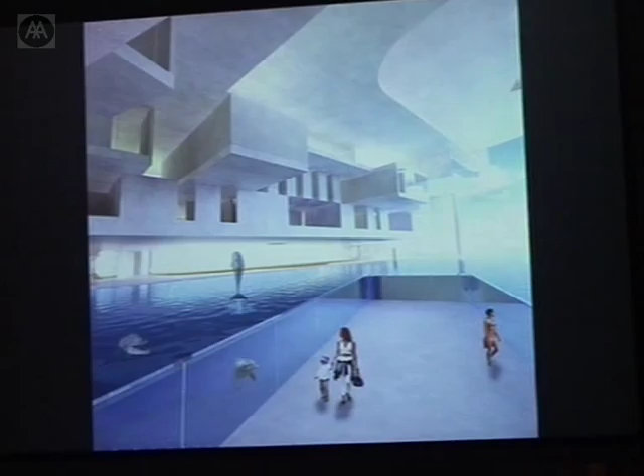On top of these caves there would be these Vietnamese rice fields. There would be the hotels and the conference spaces, constituting this artificial island, completely surrounded by water, with a beach here, an outdoor pool there, and all the water at the level of the surrounding water.

So if you move up, it's basically pools in all directions, covered by rooms in all directions. And the view from the rooms is actually going to be half the surrounding water and half its own landscape. And then the client's idea was that we would build this on a shipyard, the way you do oil rigs.

And then we would sail it, or tow it, to a convenient location and tie it down there. So the convenient location could be a nice palm tree island somewhere in the Pacific, or it could be in the middle of a fjord somewhere in Norway, or maybe even better, floating somewhere in a sea of ice, so you can choose to swim with dolphins or penguins.

In the beginning of next year, we're going to go on this tour to visit 10 different possible investors and sites, and decide where it's going to land. So maybe it's going to end up somewhere near you.

That was the last project. Does anybody have any questions?